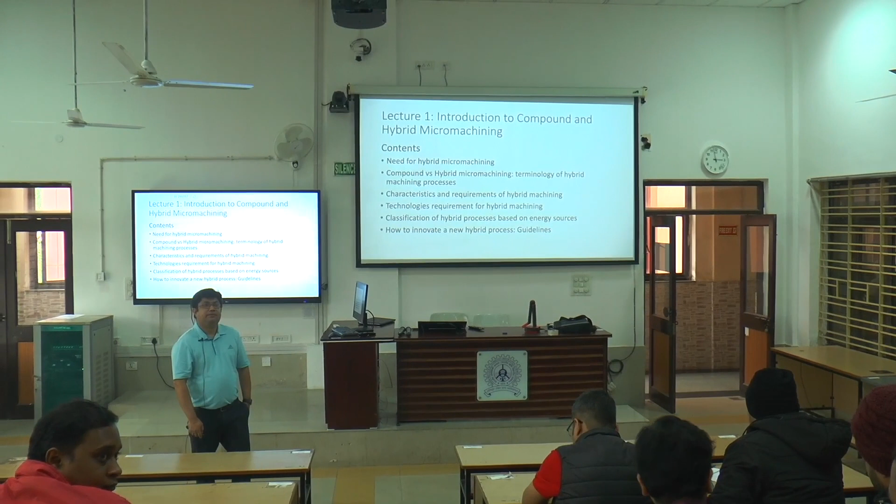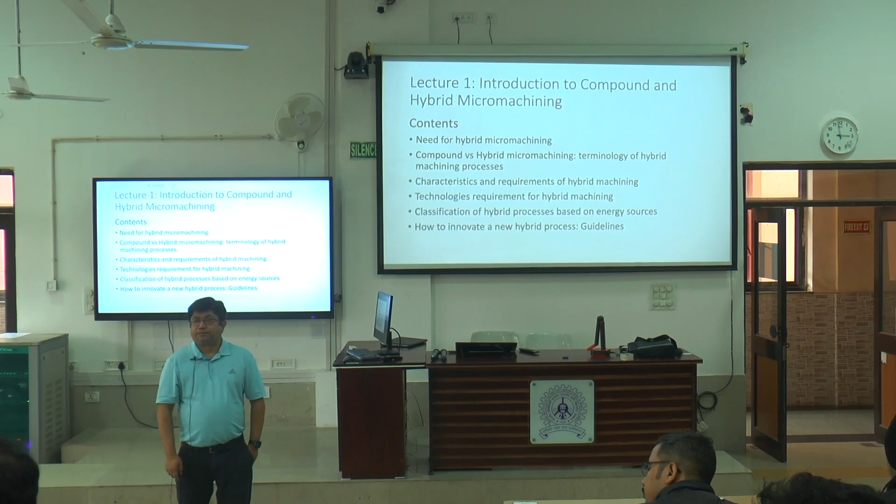Myself, Mahesh. I am a PhD scholar in the Department of Mechanical Engineering. Currently, I am pursuing research under Professor K.K. Singh sir. My research area is impact damage analysis of plastic composite. And thank you for your lecture. Thank you. My name is Saurabh Kumar Mandal. I am from NIT Jamshedpur. My area of research is flexible supercapacitor. My name is Saurabh Kumar. I am second year MTech student, mechanical engineering. My name is Ashutosh Kumar. I am doing PhD on nano composite, metallurgical and machining process. I am currently PhD in IIT Hyderabad, and my research area is biochemistry. My name is Nitish Kumar. I am research scholar here only, and my topic is hybrid micro manufacturing. I am doing electrochemical desalination process.

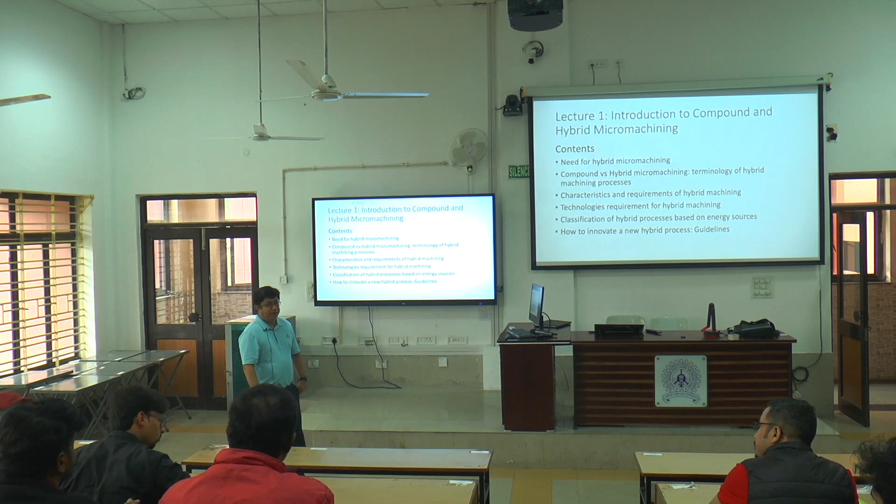Okay, so as I mentioned, the first lecture will be introduction to compound and hybrid micromachining. We have a few research scholars who are working on those areas, and some of you maybe can think of some new area. So first we're going to talk about need for hybrid micromachining. Then we'll talk about the different terminologies that we use, compound and hybrid micromachining processes. Then what are the characteristics and requirements for hybrid machining, the technology requirements for hybrid machining.

Then we'll talk about different classifications based on energy sources. So that's the main thing, or guidelines, if you want to think about hybrid micromachining processes and how you can come up with some new hybrid machining processes. So that's what I say, how to innovate a new hybrid process. We'll talk about that.

So let's start. Okay, so I know, as engineers, we would like to see lots of pictures, right? So in my other presentations or other lectures, I have lots of pictures, but this one is the introduction. So I mostly try to give a lot of information, and definitely I'll be sharing those materials. So if you read those, I think you'll have some good understanding of some of the concepts.

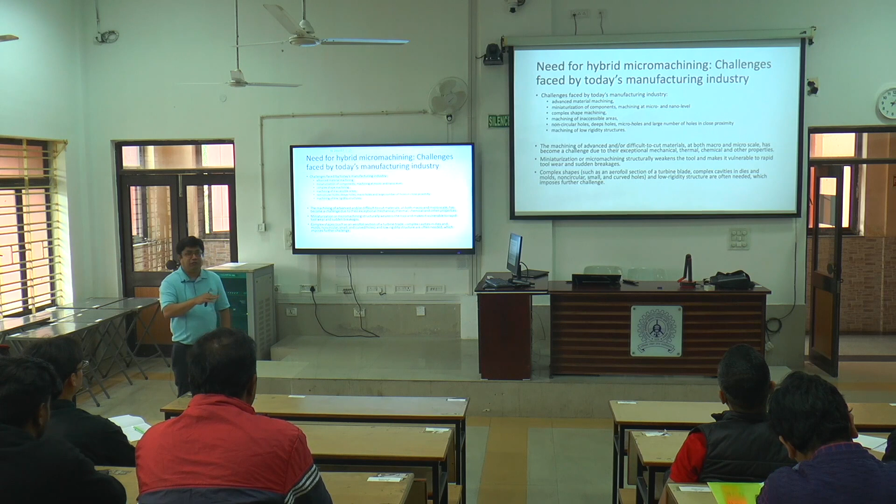So then complex shapes, machining of inaccessible areas. Necessity is the mother of invention, right? So where there is necessity, you need to come up with new processes, like for non-circular holes, deeper holes, the machining of low rigidity structures. Sometimes some structures are difficult to machine by conventional processes because cutting forces make them break down. So those are some of the challenges that necessitate thinking out of the box.

There are conventional processes and non-conventional processes, but there is probably a limitation. So how can you combine different energy sources to come up with a new process, so that you can machine the new materials and also new components? As I mentioned, a single process cannot be the solution. I'm sure all of you know about different processes. Even if you are undergraduate, you have gone through a manufacturing processes course, so you know micro turning, micro milling, micro grinding.

Remember, those processes are all available at conventional or macro scale. Although our general sense tells us that micro scale means the application of those at micro scale, it may not necessarily be true, because there is some behavior that you see only at micro scale. As I mentioned, there are some size limitations when you are machining near the grain size or particle sizes. Then there are some size effects, and other properties that you can see at the micro scale only. So although we cover mostly micro and nano range, some of those concepts can be applicable for traditional scales also.

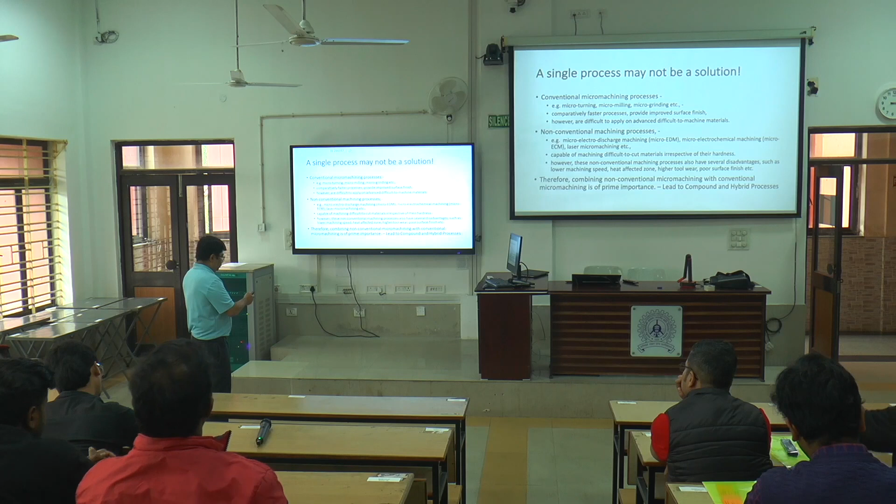Compound and hybrid machining processes: it's a combination of processes or machines to produce parts in a more effective and productive way. I already mentioned that compound and hybrid machining are sometimes used as the same processes, but honestly they are not the same. Compound machining processes also have different terms: sequential machining and asynchronous machining processes.

So one thing you need to fulfill is the requirement that you cannot take the part out of the machine. If you do milling and then take the part out and do it in another machine, it is no longer a compound machining process. Whether it is compound or hybrid machining, it has to be on the same setup, and you are not taking out or reclamping your parts. That's the requirement you need to fulfill.

But in compound processes, you are using two or more processes one after another, and each process maintains its own characteristics. If it is turning, it will follow the turning characteristics. If it is EDM, it will follow the EDM characteristics. So in compound machining, two or more processes can be applied sequentially in the same setup without any need for reclamping or taking out the part.

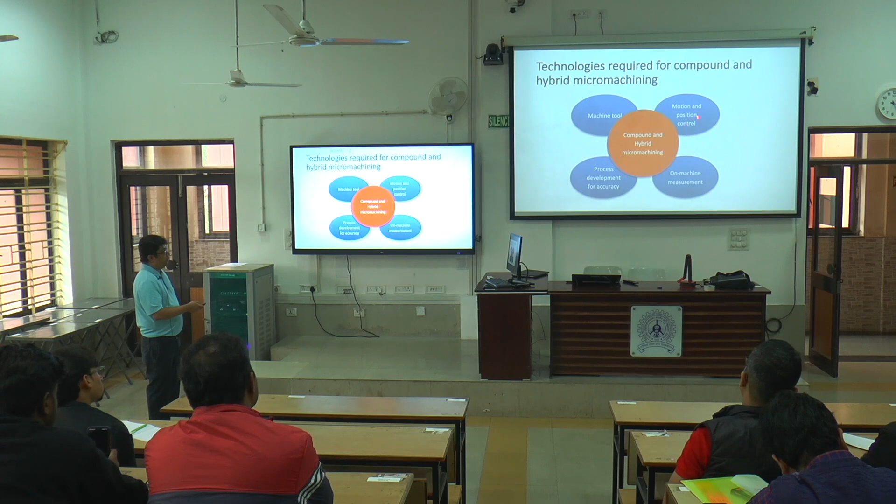So those are kind of the four processes. So you have four required technologies. So machine tool, this is a must. You need to have a machine tool, and then for that machine tool you need to have position and motion control, on machine measurement, and then process development to make things accurate. So I think we talked about that, so skip that.

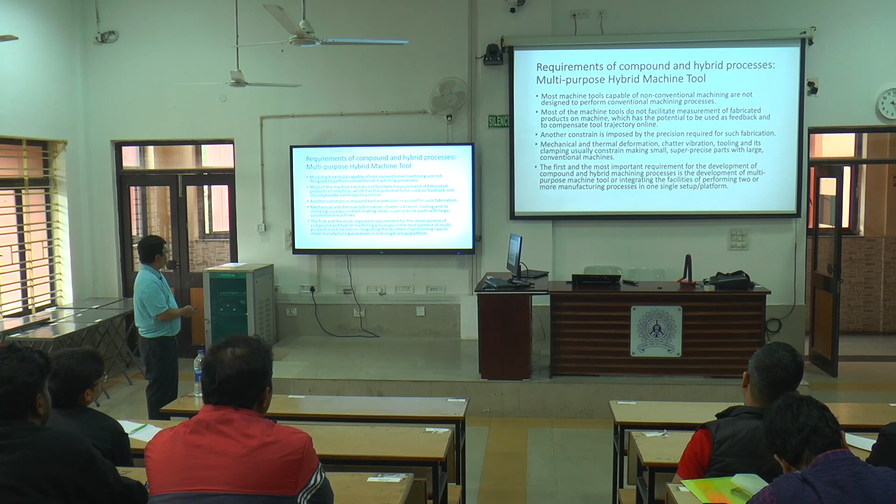Now, a few things you need to consider. For example, when you are talking about machine development, the rigidity and vibration of those machines. Then you are doing some vibration analysis for the machine, which is very important. So your target is to make the machine lighter, but at the same time, lighter will also introduce some vibrations, right? So the machine rigidity is also important. Then the thermal expansions should be minimized. Then, for example, advanced sensors and instruments can be employed.

Another important thing is that in hybrid machining, the clamping and re-clamping error needs to be removed. I can give you one example. For example, in your machine you have some spindle runout. Okay. So before starting any machine, what do you do? You try to measure the spindle runout. Then you think how I can get rid of the spindle runout.

For example, if you are doing turning and there is some runout and you do just one pass to define 0, 0, then after that it becomes coaxial. If you don't take it out and you do all the machining there, there is no spindle runout. Or if you are doing milling and you get rid of that spindle runout, until you take this out, there is no runout there. Okay, so that's one of the goals of the hybrid machining process.

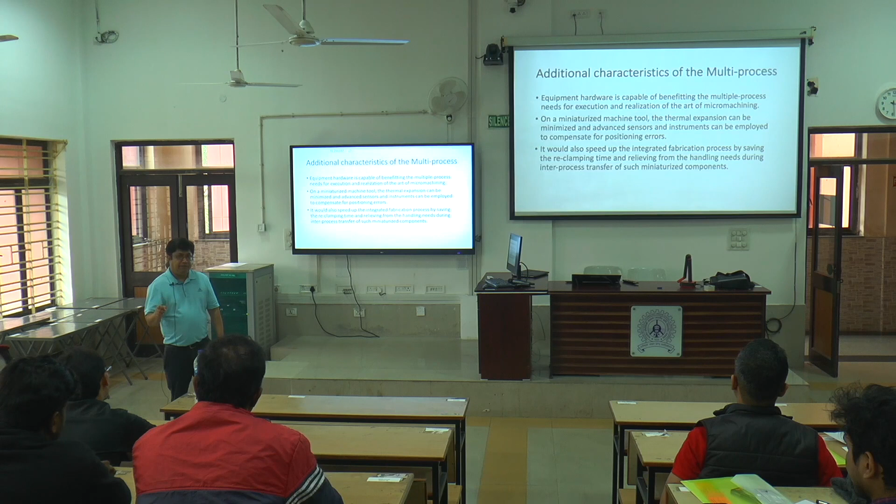Then the first thing you can do after installing is maybe reducing the tool diameter or doing some initial turning. You can actually get rid of the spindle runout, and then you can really obtain some micro level accuracy. Okay, so using simple, inexpensive equipment, you will be able to actually obtain a very highly accurate machine, if you actually follow that.

So this is one of the equipment. Actually, my PhD supervisor, Professor Raman, has his startup company. So during our PhD, we worked on the development of those at that time. I think now the equipment is available. So for this, the most interesting thing was, for example, here, this is an interchangeable. Okay, so let me probably.

So here, this is actually interchangeable. You can use the screws, there are some screws here, so you can actually put this back and then take it out. So you can use separate attachments, for example die-sinker, wire EDM, then wire EDG. Then I think recently he started laser also. So those use the same setup.

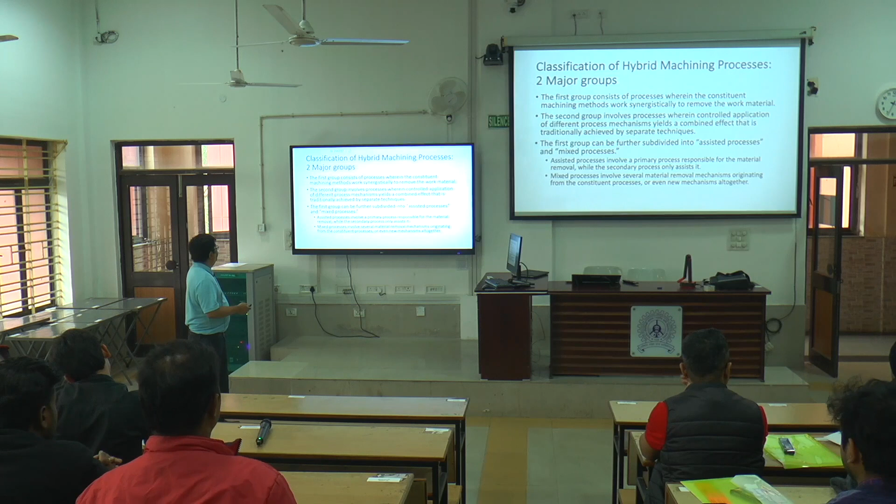Okay, so sorry about the interruption. Okay, so

Classification. I believe I talked about that classification. So the first group is compound micromachining processes, or sometimes we call them sequential processes. And the second group is hybrid processes, and I think I made the differentiation before, right? In the hybrid processes, sometimes we call them mixed processes, sometimes assisted processes.

So what's the difference? In the assisted processes, you have a single process which is dominating, we call it the primary process. For example, vibration assisted EDM. The EDM process is dominating, the primary process. And vibration is a mechanical assistance added to the EDM process. That mechanical assistance may not be directly responsible for removing the material, but it can aid in improving the material removal. So that is your assisted process.

Again, we're going to go into much detail for each of those later. Today is just an introduction. So in the assisted process you have a primary process responsible for the material removal, and a secondary process which assists in one or all of the parameters. Vibration assisted EDM helps you remove the debris from the machining zone and reduce the ineffective pulses, which helps improve material removal rate and surface finish. But sometimes the dimensional accuracy may suffer because of that additional action of the vibration.

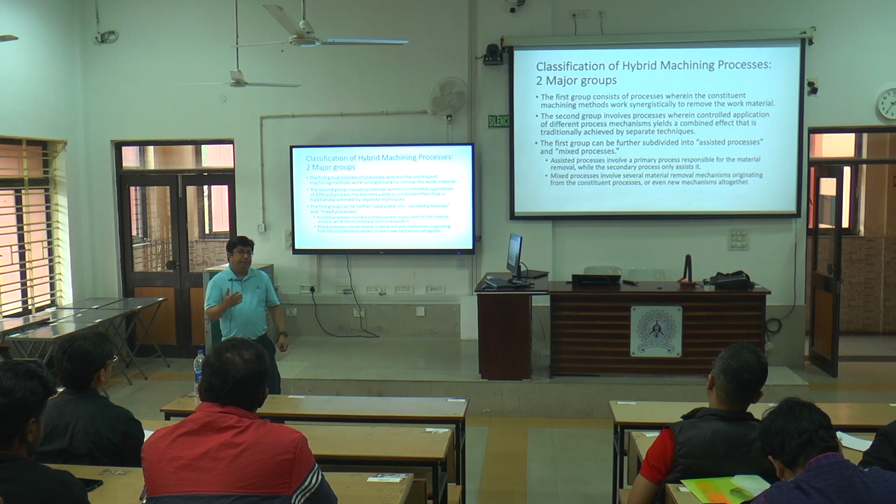But mixed processes or concurrent processes, let's speak of another process, for example abrasive assisted grinding. In the grinding process, you have mechanical particles in the grinding wheel, and you use some coolant or slurry to do the machining. Now just think, what if that slurry itself has some chemical properties, like in ECM, where you use an electrolyte to do the chemical reaction and remove the material? What if I use some electrolyte in the abrasive slurry for the grinding process?

Now what happens? In the grinding process, sometimes an oxide layer forms, and that kind of ceases the process or reduces the material removal rate. Now if you have those chemicals with the abrasive, that helps do some chemical dissolution, and the overall performance is improved. Now you cannot really separate the two things. You can do more investigation, but you cannot say this time only chemical reaction happens and this time only mechanical action happens. It is an interaction.

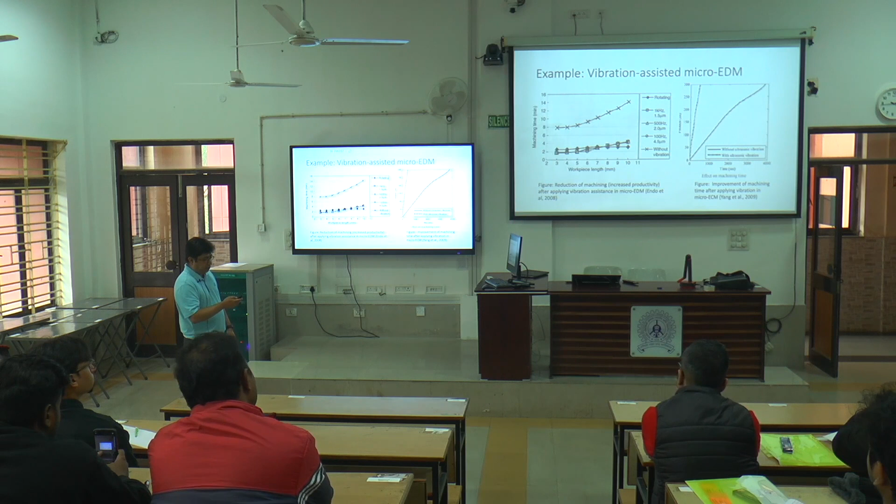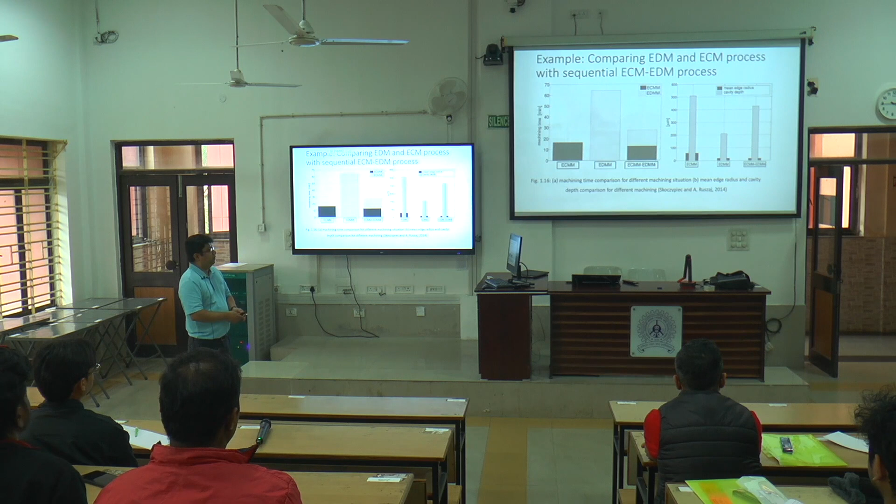Okay? Sometimes edge radius is difficult to control in the ECM process, so things become larger. But in EDM you can control that, and if you use two processes sequentially, it definitely is better.

Now, how is the performance improved? It is not just 1 plus 1 equals 2. If you have two processes, A and B, the performance should be the performance for A, plus the performance for B, plus the performance for A times B. That means there should be some additional performance improvement for the concurrent applications also.

Now, I think I can just go quickly through this. I'll share those slides with all of you. Okay. So this is just the advanced manufacturing processes based on different energy sources.

Okay. How long can I take? 5 to 10 minutes. Over? Yes. Yeah, maybe 5 minutes I will take. Okay.

So this is important. If you know which process uses which energy source, later you should be able to combine those. Here, ultrasonic machining uses ultrasonic vibration, one of the machining processes uses hydraulic pressure, then you have ECM, electrochemical, then the thermal ones: EDM, electron beam machining, laser beam machining, ion beam machining, plasma jet machining.

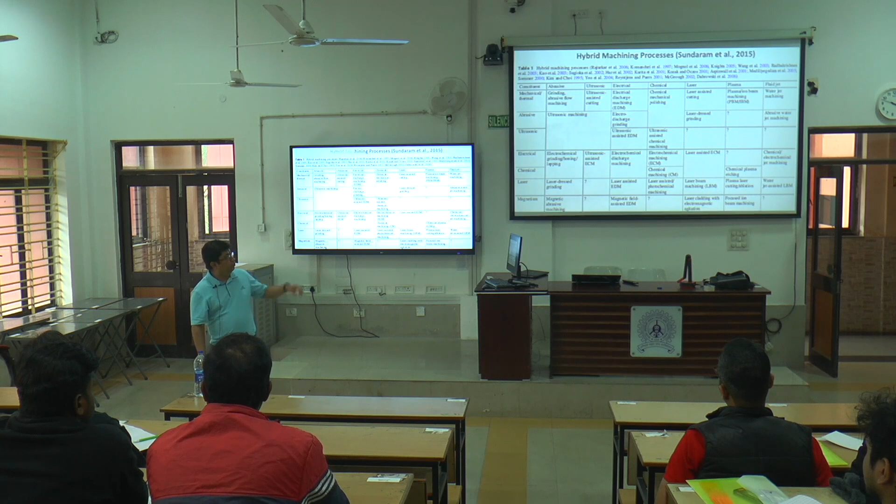I will share the slide with you and you can share it with everyone, so that we'll go more into detail for each of those. But I think this is the introduction for today. This is the same, just with examples. Maybe in one of the lectures we'll do a case study and discussion, to see how we can come up with ideas to solve some problems. The last few slides are really a guide to think about innovating new hybrid processes.